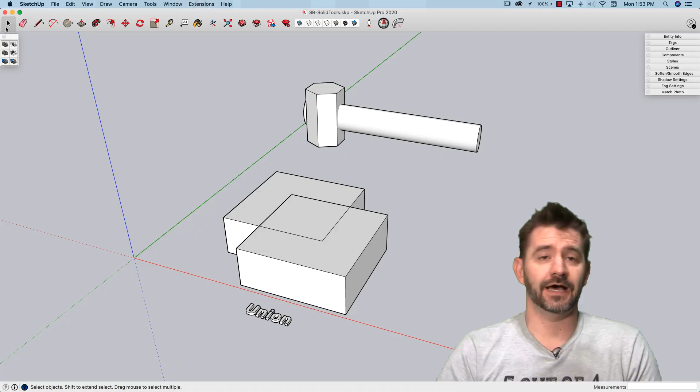Okay, so here I have the Solid toolbar turned on. There's only 6 buttons, it's a pretty simple toolbar. On here we have each of the pieces: outer shell, intersect, union, subtract, trim, and split. So I want to just run through how each of the 6 of these work and where you might actually use them. I figured a couple cases for each one with just 2 groups. So I can click on either one of these. If I turn on entity info, I can see these are both solid groups. So let's see how it actually works.

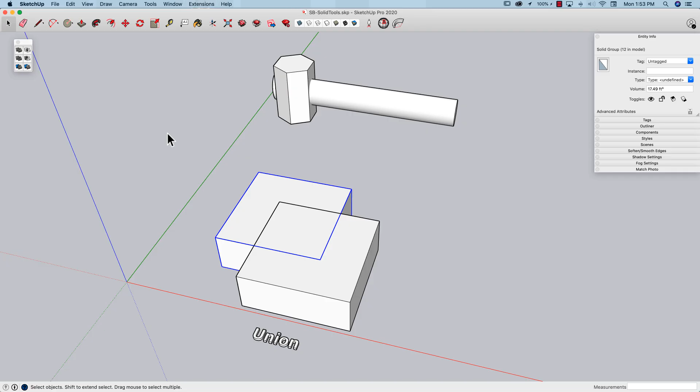So if I select one of these, click on the first one, we're looking at union first. I'm going to click on union, click the other. What happens? They become one piece. That's how union works. So when would you want to use this?

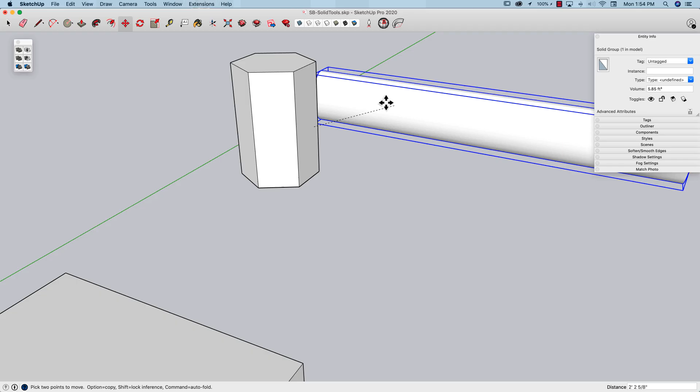Well, I got an example right here. So I have this little super basic, super simple mallet thing. Right now it's 2 separate pieces. So I have a solid here, and they just kind of run through each other. Obviously, if I try to move one of these, it's not going to move the other. So I could go grab these 2 and group them, but they'd be 2 separate pieces. If I want to make them one piece, I could select one, click union, and click the second. Now I have one brand new solid that has been unioned.

Can you use union like a past tense verb? Anyhow, that is an option.

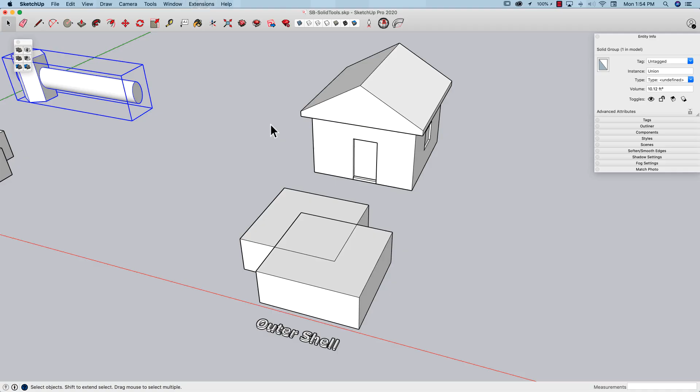So how is that different from outer shell? The results in the simple example will be very similar, because if I select one, hit outer shell and select the other, it's going to create pretty much the same thing. A neat thing about outer shell too is, if I undo that, outer shell will let you grab a bunch of pieces at once and click outer shell.

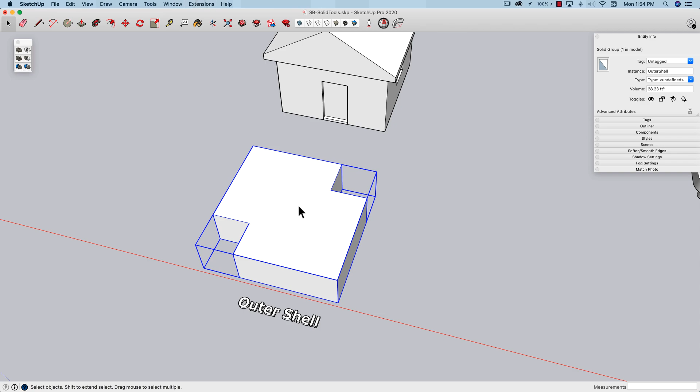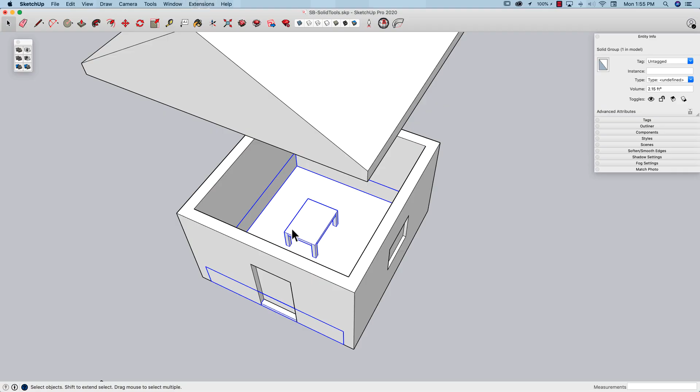So if I look at this right here, this is a good example of what outer shell does. So here I have a little house, so let me take these pieces and just move them vertically so you can actually see what's inside here. So here I have a roof, these walls are a group, and here I have a floor that has a table built into it.

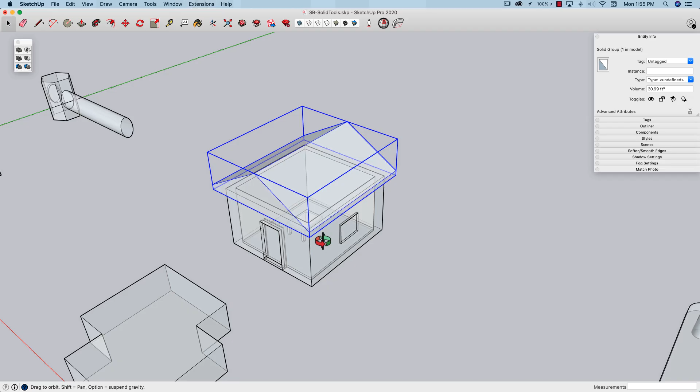Because training example, that's why. So if I was to just take this as it is, I could one at a time make these pieces go together using something like union, and I'd have a solid at the end. That would not be a problem, that would be easy. The difference with outer shell is when it joins this geometry together, it's only going to be concerned with what's on the outside. So things like the insides of these walls or the doors or the geometry of the table are going to all disappear when I select it all and click on outer shell.

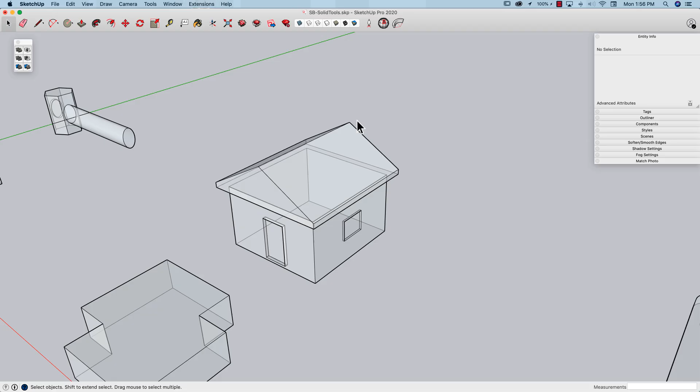See that? So that is the big difference between union and outer shell. Union will combine geometry together, but if there's voids or geometry on the inside, as long as they're all touching and it makes a solid, it's going to honor it. Outer shell wipes it all out and only keeps the exterior faces. So that's the big difference between those two.

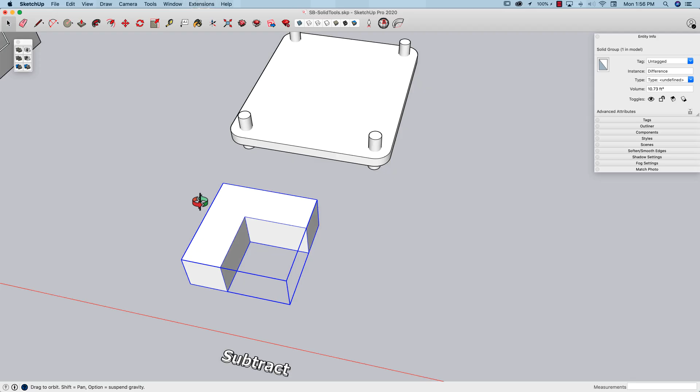All right, now we have subtract. Let's see how that works. Subtract is going to take away one geometry's mass from another. So there we go. Something that's very important with subtract is the selection order. You want to select the cutter first and then what is to be cut.

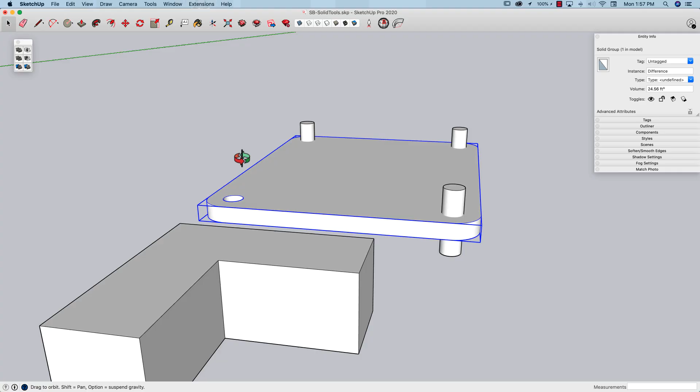So here, if I have this plate right here and I want to put screw holes into it, what I have is a bunch of basically dowels at the corners. So what I would do is select one of these, say subtract, and then pick the main plate. That will put a hole through there. So it's real important: select what you want to subtract first, then choose subtract and select what is going to be subtracted from.

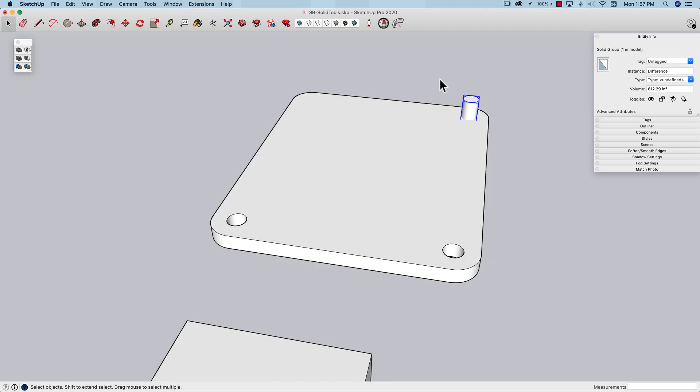So you can see that's time consuming. My desire would be, of course, to select multiple, hit subtract, and notice that doesn't work, because what it just did is subtract one geometry from another. So what happens if I select 3 and hit subtract? Well, it tells me it requires exactly 2 solids. So with subtract, your only real option is one at a time to come through here and subtract these out.

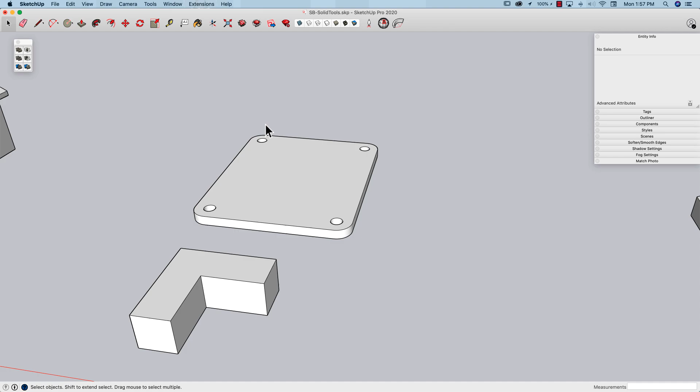That's your only option right now. In later videos, we'll get into how to actually make that happen a little bit quicker and easier, but that's the basics of how subtract works, which is similar but not the same function as trim.

So the way trim works, it's also going to take geometry away from another geometry. So I'm going to select, the rule still applies. What do I want to cut first? What's my trimming piece? What's my subtracting piece? My trimming piece I'm going to select first. Then I can click on trim and then select the other piece.

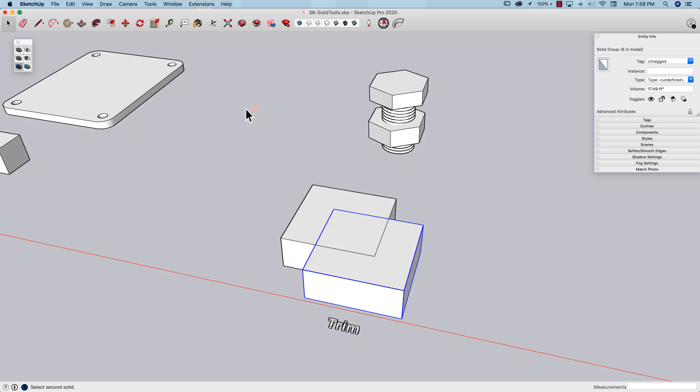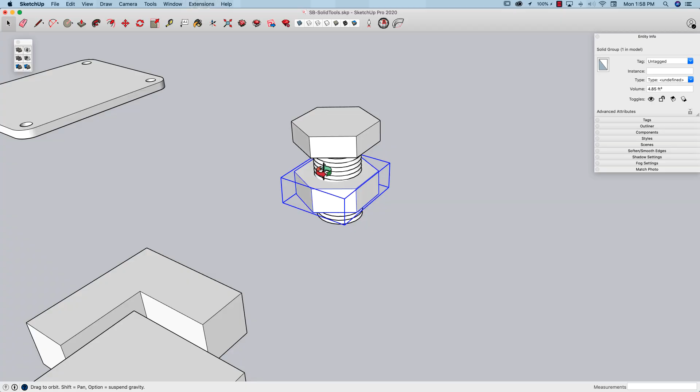The way this differs from subtract is, you can see that, look at that, it keeps my original geometry, my cutter, intact. So if I wanted to take this piece right here, which is just a push-pulled hexagon, and I want to actually bore out the threads for this bolt to go through, so I'm going to create a nut, what I could do is select, first, like I said, the cutting geometry, choose trim, and then pick on the piece that I want to have that cut out of.

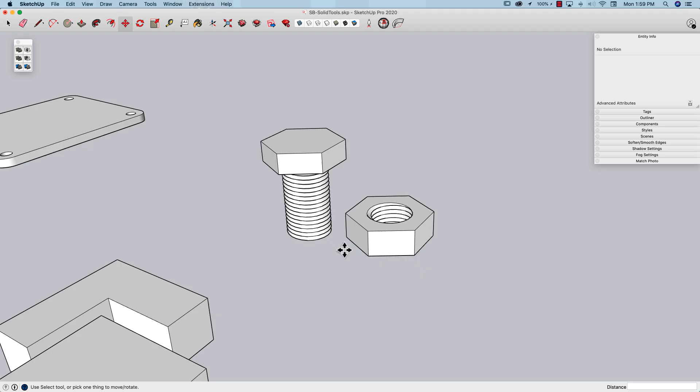With that, there we go, it cut those threads out of the solid shape. So this is really nice. When over here I had throwaway cutters, I just had extruded circles that were just going to get thrown away, no big deal. Here, if I had used subtract, I would have got this nut, would have been great, but my bolt would have been discarded because it would just use it as a cutter and then throw it away. So that's the big difference there between subtract and trim.

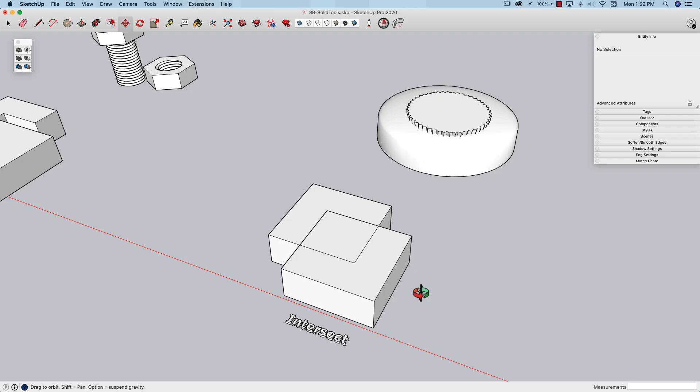Similarly, we have down here intersect and split. So the way intersect works is I'm going to select one geometry, then choose intersect and choose another, or select 2 geometries. Either way works. But when I hit intersect, I get just the leftover geometry, just where they crossed. So anything that falls outside of the overlapping geometry is discarded.

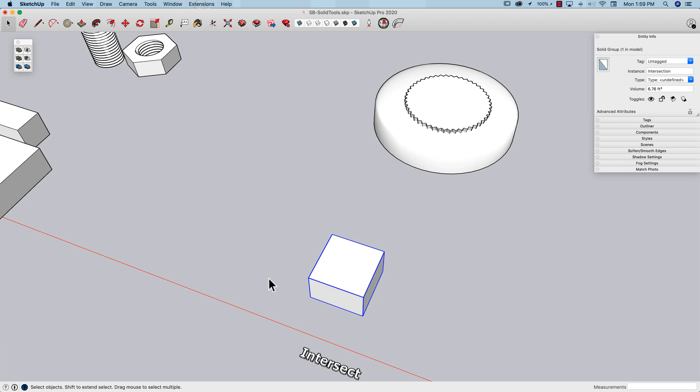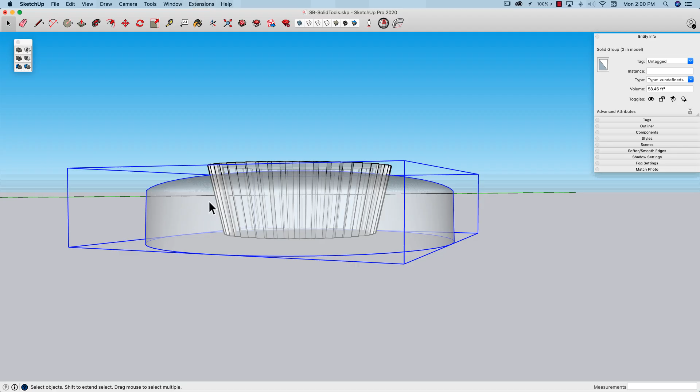So say I want to do something like this. I have this little dome shape, and right here I have this crinkly outline. So let's say I want to use these 2 geometries and I want to make like a peanut butter cup or something like that. Well, not something like that. That's exactly the geometry I want to create. So you can see here my dome piece is one set of geometry, and then down here my, I don't know, crinkling, undulating outline, back and forth all the way around, is a separate geometry.

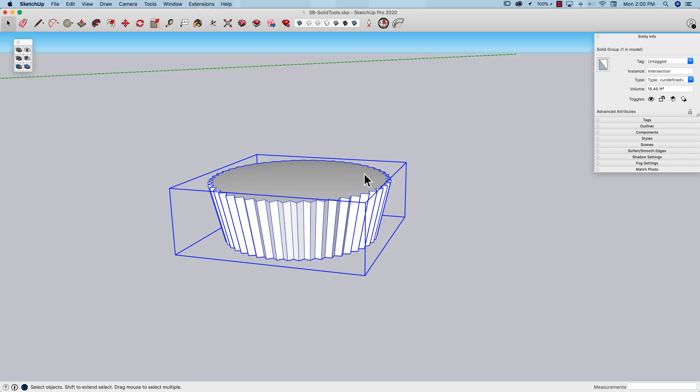So if I select both of these and then I click on intersect, that's what I end up with. You can see it kept that dome geometry and it got the outside there. Only the pieces that overlapped were kept. Everything else was discarded. So how is that different from split?

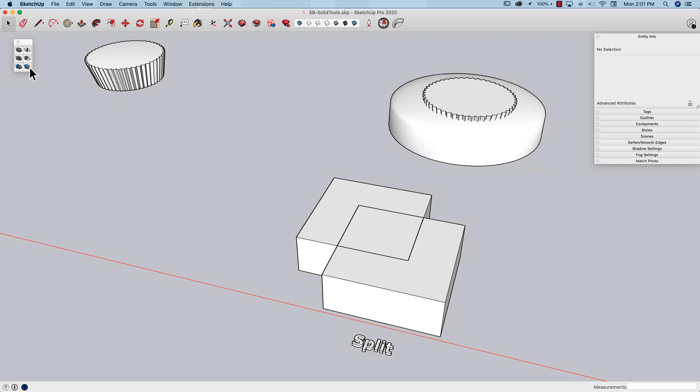Okay, so I know I cheated here. I had the same example twice, but for the life of me, I could not figure out another example for split. So let's see what happens. So I'm going to select both these 2 pieces. Rather than choose intersect, I'm going to choose split. And it looks like nothing happened, but what happened was this piece got cut and this piece got cut.

So split acts very, very similar to the way that intersect does, but it leaves all the pieces behind. So this is now a single piece. It's not the 2 pieces that intersected. It's just a single piece and these 2.

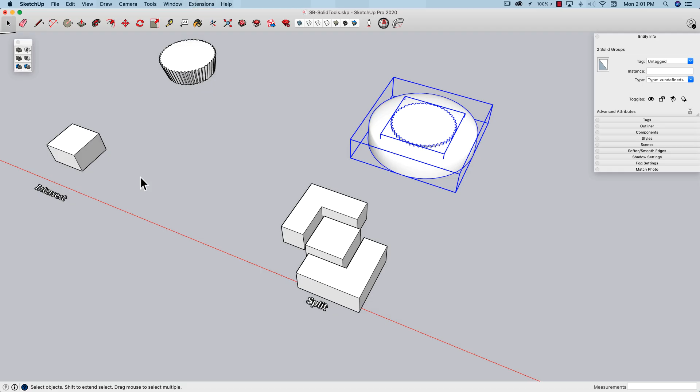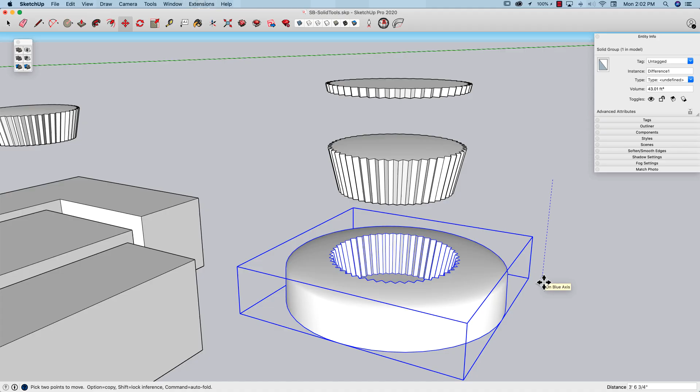So if I take that same peanut butter cup example, and I select both of them and then click on split, what I end up with is something like this. There's the piece that got cut off the top. Here's the piece that got cut off the bottom. So I end up with all 3 pieces sticking around.

So there may be situations where you're creating an assembly or something like that where geometry is going to overlap and you want to break it. And split's great for that because it will actually maintain all that geometry. So there you go. That is Solid Tools in a nutshell. Hopefully those different examples help you remember which is which.

I still sometimes have to, in my head, run through, wait, what does this do again? And you guys probably saw me, I kind of had to hover a couple times there. I don't always remember exactly which icon is which. But those are some, I think, pretty solid examples of how the tools work, and hopefully that helps clear up any confusion you have, or maybe this is the first time you've seen anything on solid tools, and hopefully that's a good way to cement them in your brain as to how they work.